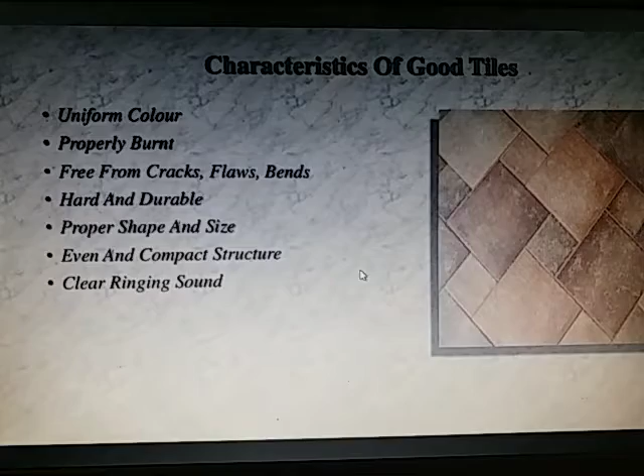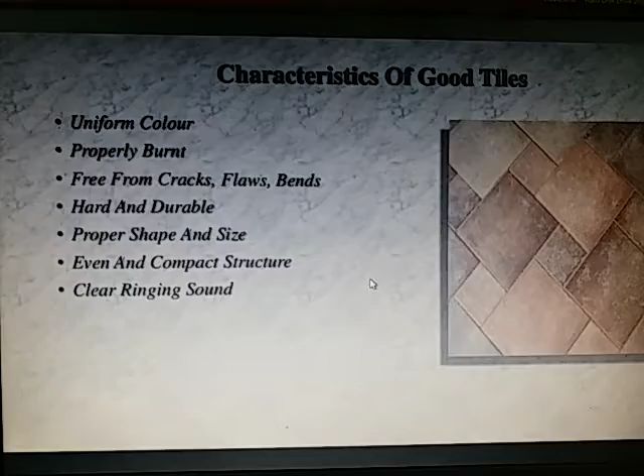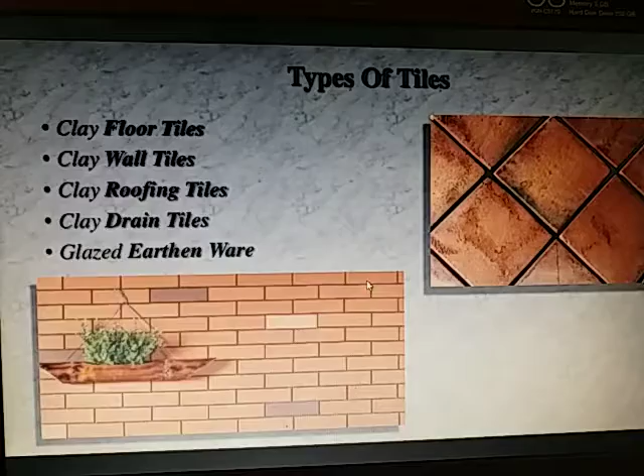Now types of tiles: floor tiles, wall tiles, roofing tiles, drain tiles and earthenware. First let's talk about clay floor tiles.

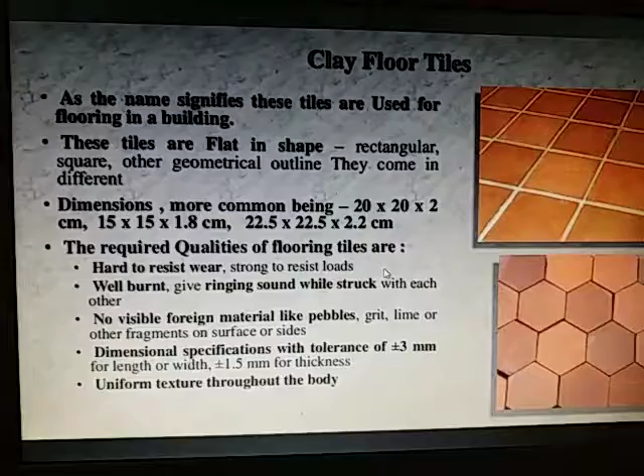As the name signifies, these tiles are used for flooring in the building. These tiles are flat in shape, can be rectangular, square, or any other geometrical outline. They come in different dimensions, most common being 20 by 20 into 2 centimeter, 15 by 15 into 1.8 centimeter, and 22.5 into 22.5 into 2.2 centimeters. Now what are the qualities of flooring tiles?

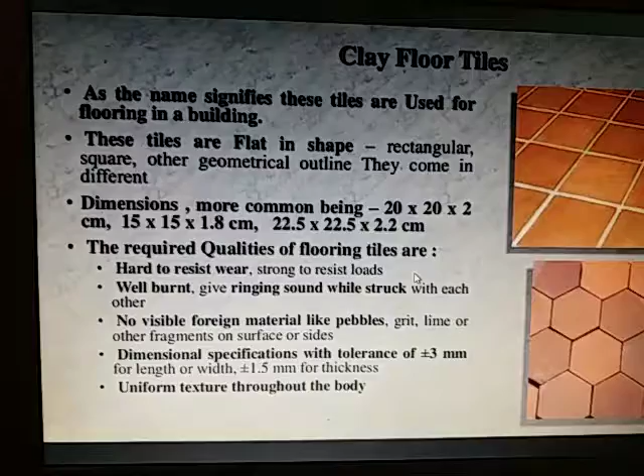They are hard to resist wear, strong to resist loads, well burnt, they give a ringing sound while struck with each other, no visible foreign materials like pebbles, grit, lime or other fragments on surface or sides. Dimensional specification with tolerance of plus minus 3 mm for length and width, and plus minus 1.5 mm for thickness. They should have a uniform texture throughout the body.

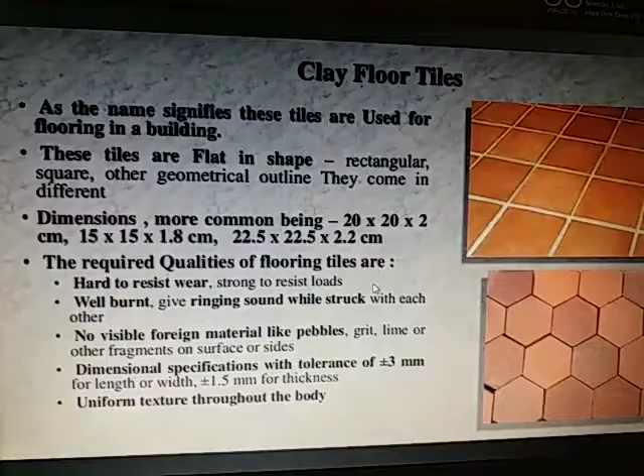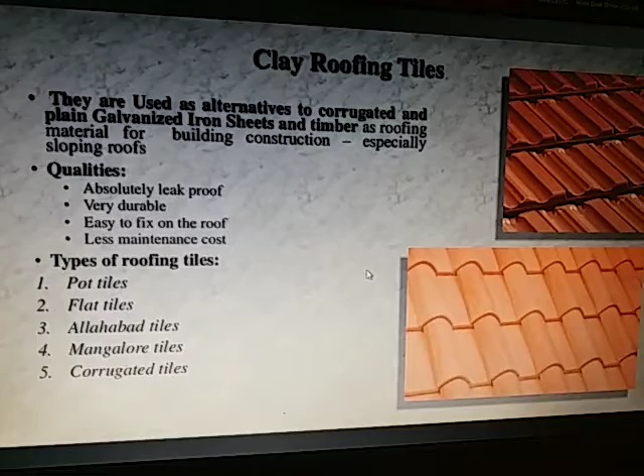Roofing tiles are used as alternatives to corrugated and plain galvanized iron sheets and timber as roofing material for building construction, especially where slope is provided in roofs. Their qualities are: they are absolutely leak proof, they are very durable, they are easy to fix on the roof, and they have a less maintenance cost.

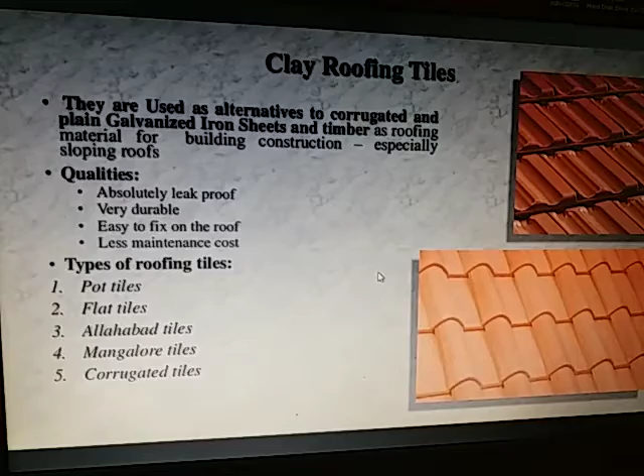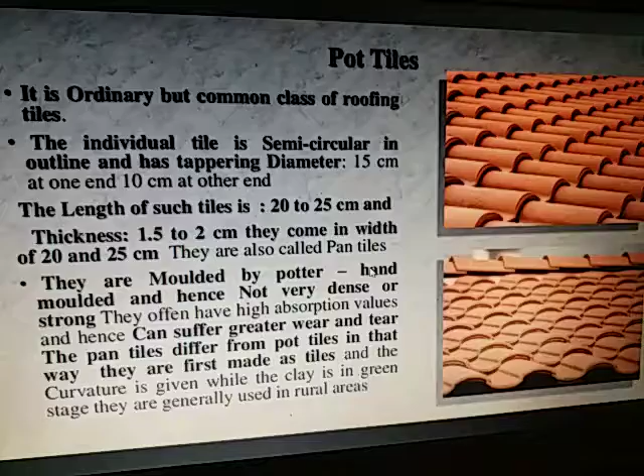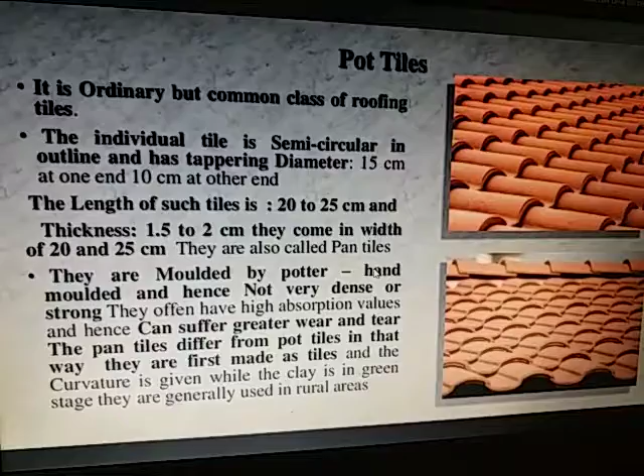Pot tiles are an ordinary but common class of roofing tiles. The individual tile is semi-circular in outline and has a tapering diameter of 15 centimeters at one end and 10 centimeters at the other end. The length of such tiles is 20 to 25 centimeters and the thickness is 1.5 to 2 centimeters. They come in a width of 20 to 25 centimeters.

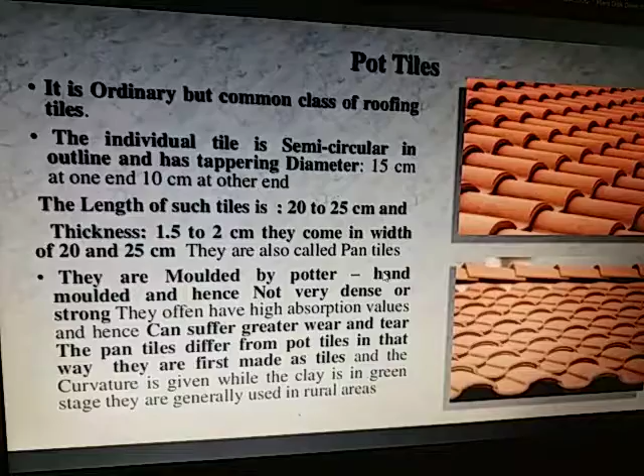They are molded by potter, hand molded, and hence not very dense or strong. They often have high absorption values and hence can suffer greater wear and tear.

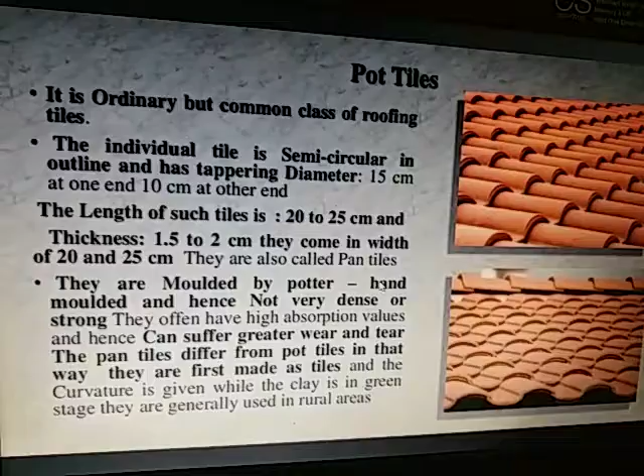Pan tiles differ from pot tiles in that they are first made as flat tiles and the curvature is given while the clay is in the green stage, when it is slightly wet. They are generally used in rural areas.

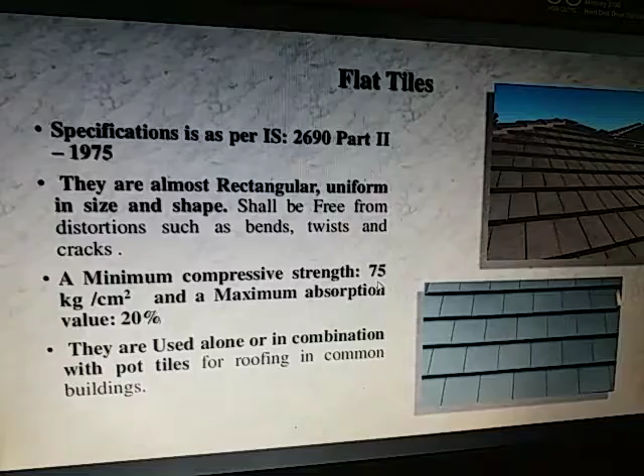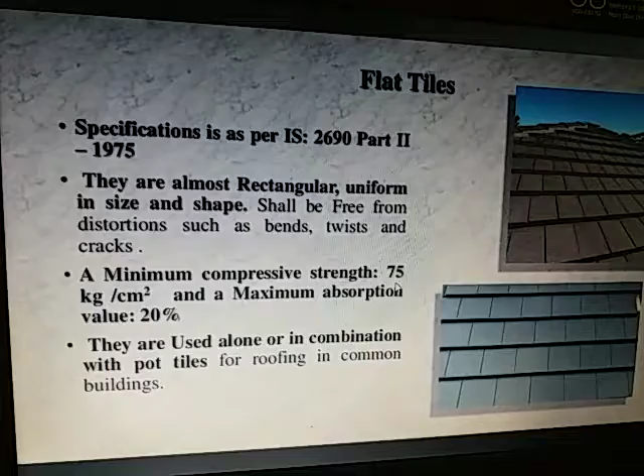These are flat tiles. They are almost rectangular in shape, uniform in size and shape. They shall be free from distortion such as bends, twist and crack. Minimum compressive strength is 75 kg per centimeter square and maximum absorption value is 20%. They are used alone or in combination with pot tiles for roofing in common buildings.

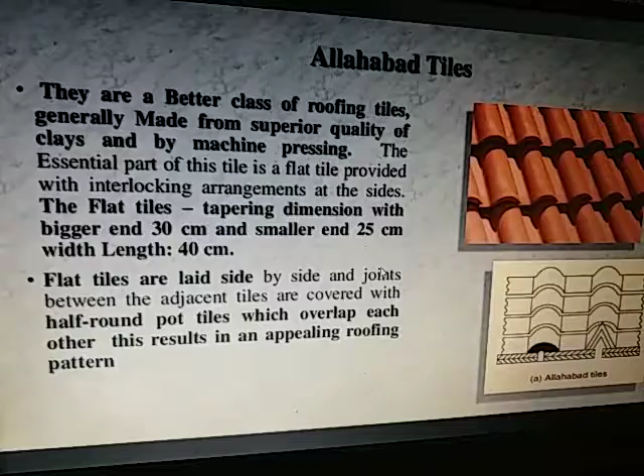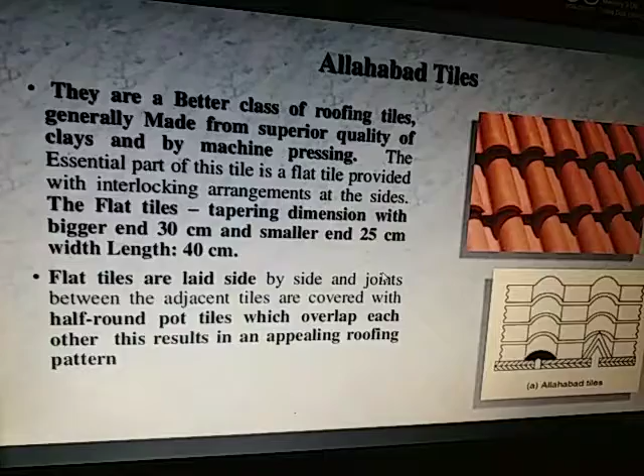Allahabad tiles are a better class of roofing tiles. They are generally made from superior quality clays by machine pressing. The essential part of this tile is a flat tile provided with interlocking arrangement at the sides. The flat tile has a tapering dimension with bigger end 30 centimeter and smaller end 25 centimeter, and the width length is 40 centimeter.

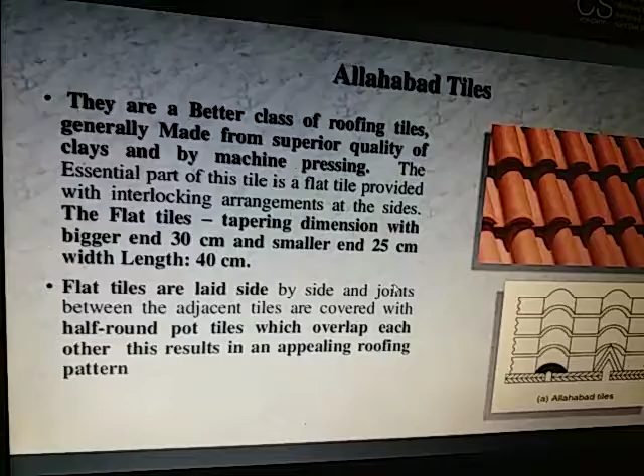Flat tiles are laid side by side and the joints between the adjacent tiles are covered with half-round pot tiles which overlap each other. This results in an appealing roofing pattern.

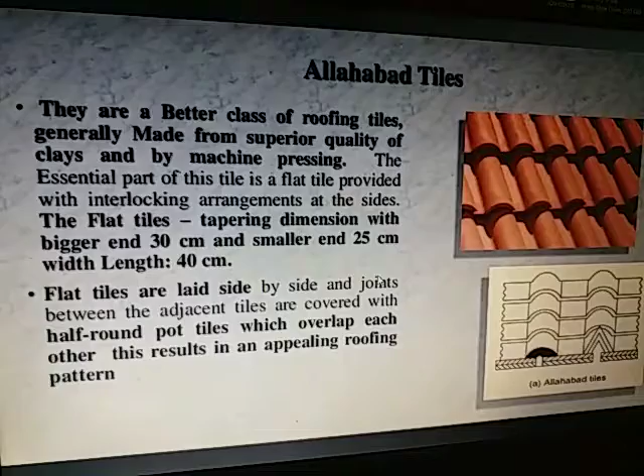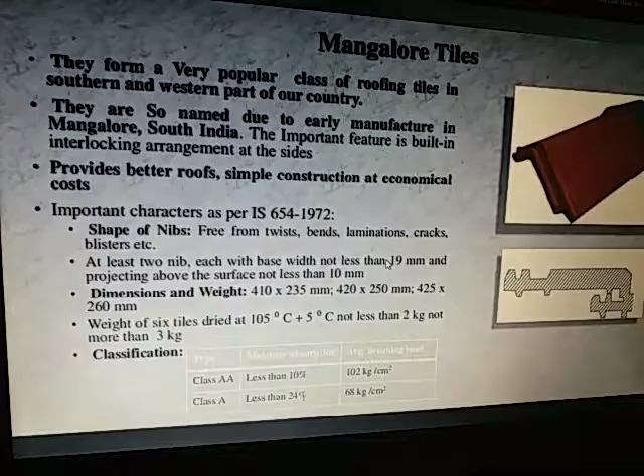Mangalore tiles form a very popular class of roofing tiles in the southern and western part of our country. They are called Mangalore tiles due to their early manufacture in Mangalore, South India. The important feature is the built-in interlocking arrangement at the sides. They provide a better roof with simple construction at economical cost.

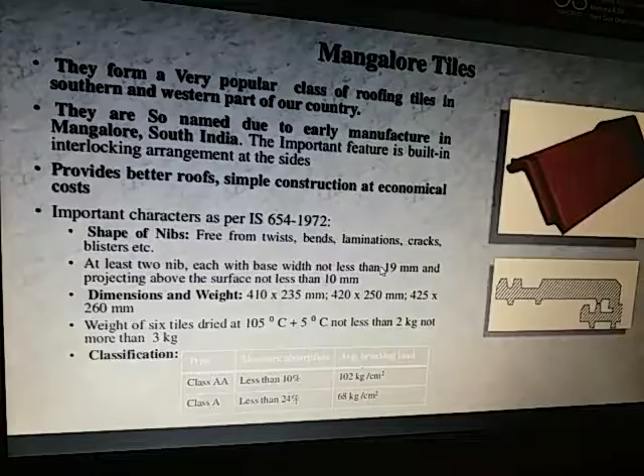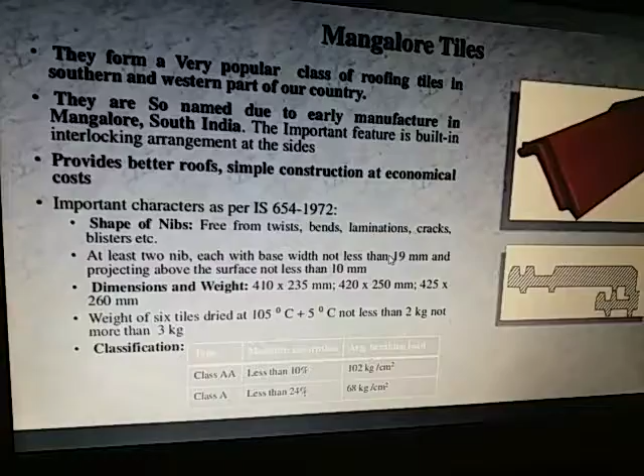There are some important characteristics. The first is the shape of nibs. They are free from twist, bends, lamination, cracks and blisters. At least 2 nibs, each with base width not less than 19 mm and projecting above the surface not less than 10 mm.

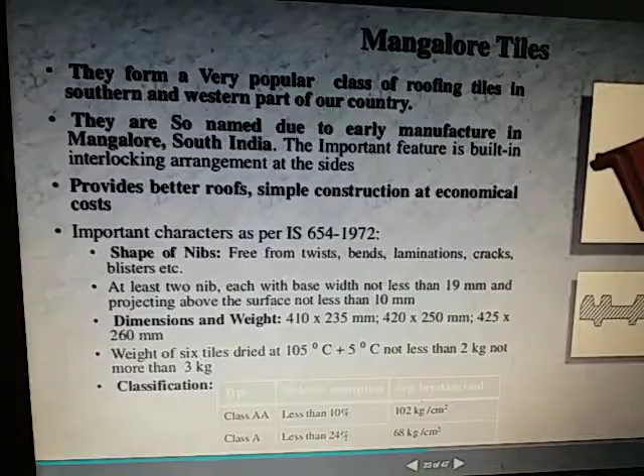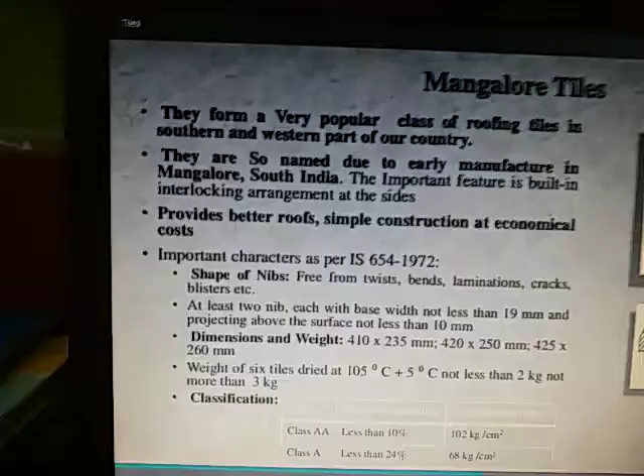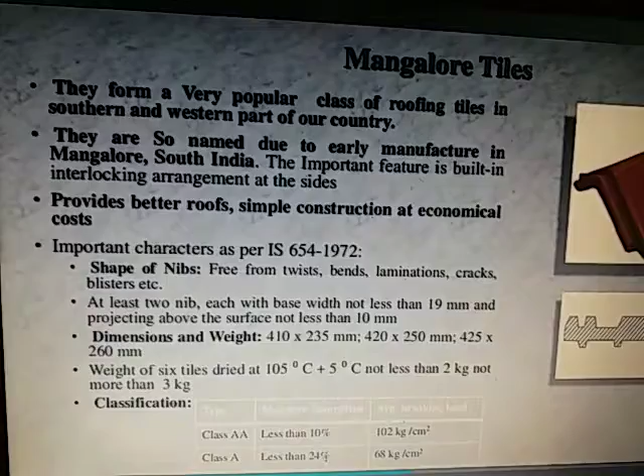Dimensions and weight: the dimensions are 410 x 235 mm, 420 x 250 mm, and 425 x 260 mm. The weight of 6 tiles dried at 105 degree Celsius plus minus 5 degree Celsius should not be less than 2 kg and not more than 3 kg.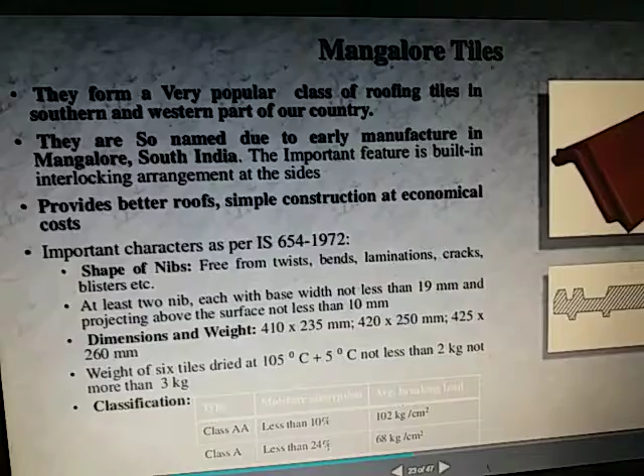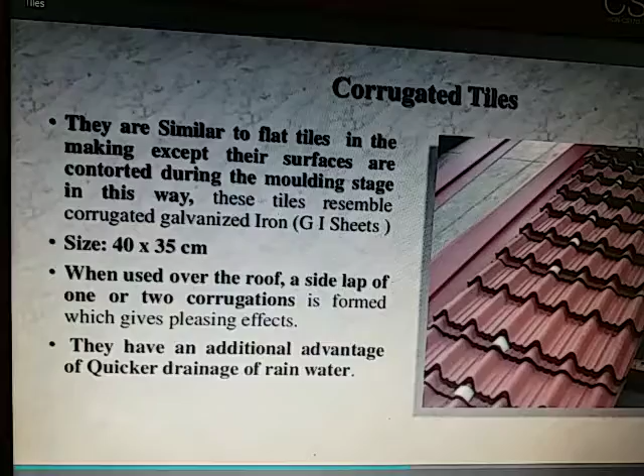They have an additional advantage of quicker drainage of rainwater.

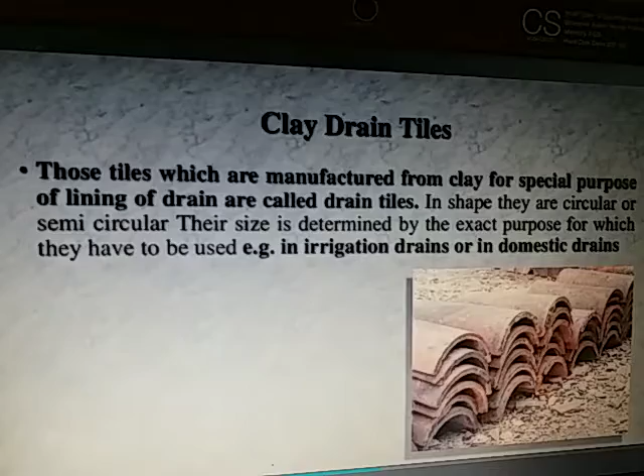Now, drain tiles. These tiles, which are manufactured from clay for the special purpose of lining drains, are called drain tiles. They are circular or semicircular in shape. Their size is determined by the exact purpose for which they have to be used, like irrigation drains or domestic drains.

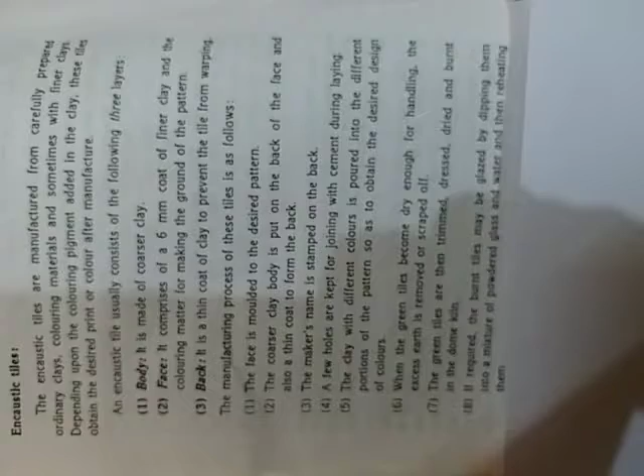Encaustic tiles, we had discussed earlier. They are manufactured from carefully prepared ordinary clays. Coloring materials are added, sometimes with finer clays. Depending upon the coloring pigment added in the clays, these tiles obtain the desired print and color after manufacturing.

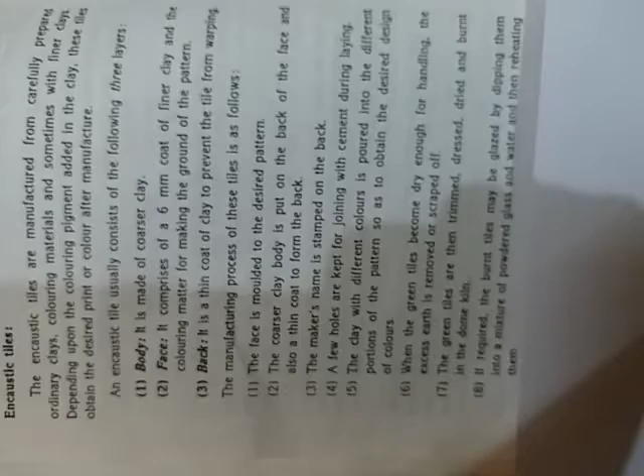They have 3 layers. Body, made of coarser clay. Face, comprising a 6 mm coat of finer clay and the coloring matter for making the ground of the pattern. And back, a thin coat of clay to prevent the tile from warping.

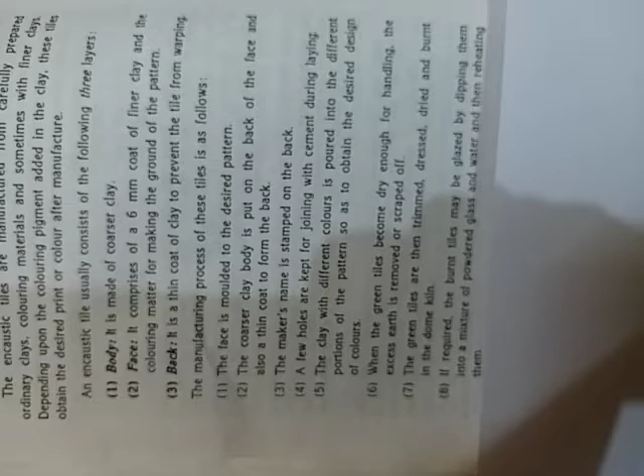In the manufacturing process, the face is molded to the desired pattern. The coarser clay body is put on the back of the face, along with a thin coat to form the back. The maker's name is stamped on the back.

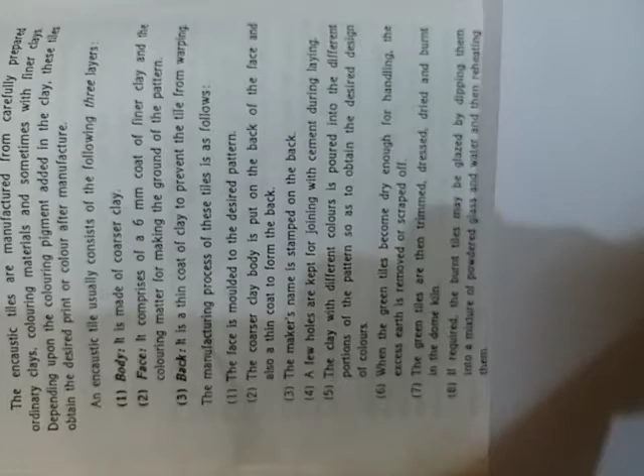A few holes are kept for joining with cement during laying. Clays of different colors are poured into the different portions of the pattern to obtain the desired design of colors. When the green tiles become dry enough for handling, the excess earth is removed or scraped off.

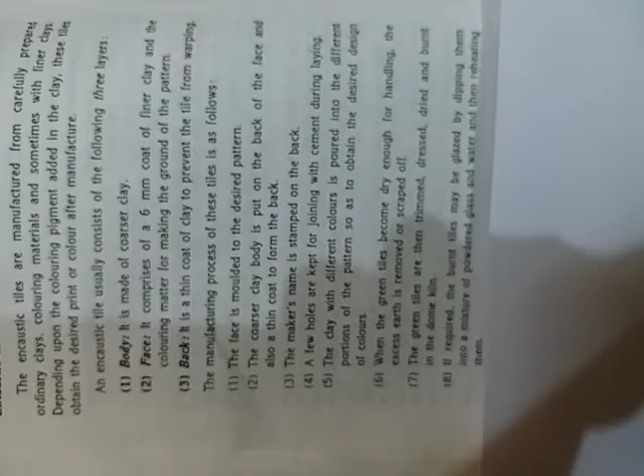The green tiles are then trimmed, dressed, dried and burnt in the dome kiln. If required, the burnt tiles may be glazed by dipping them into a mixture of powdered glass and water and then reheating them.